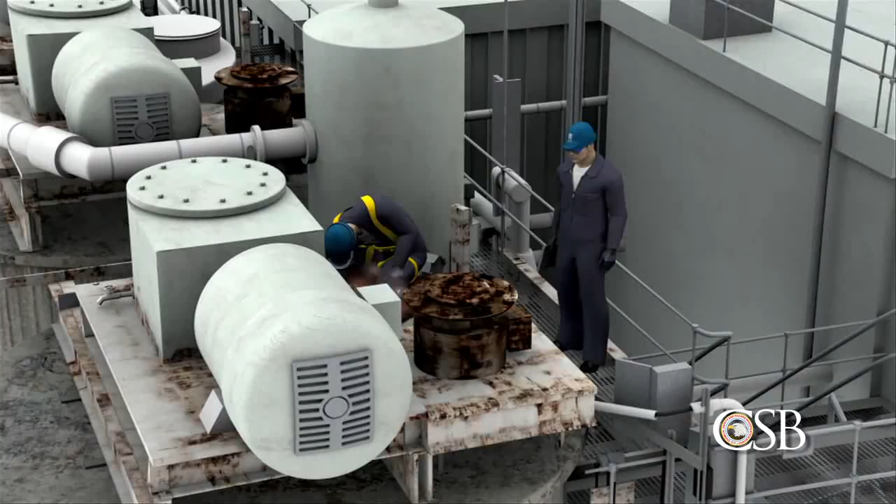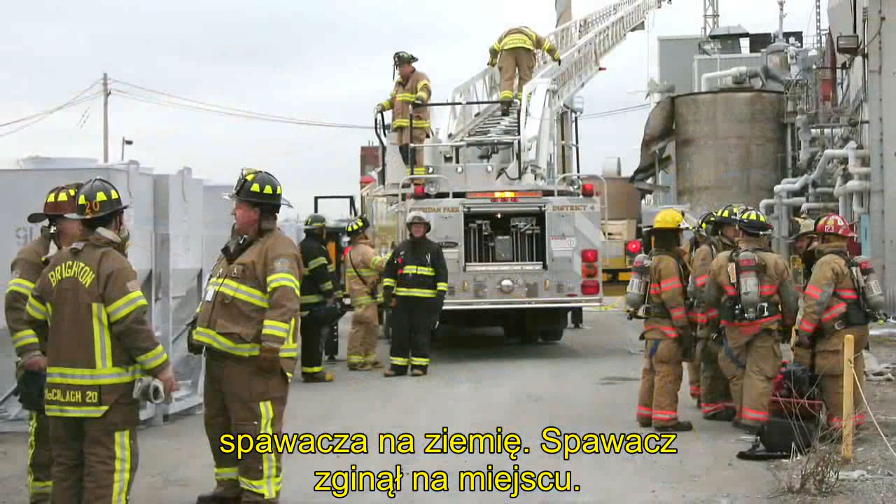On November 9, 2010, a powerful explosion shook the DuPont chemical manufacturing plant in Tonawanda, New York, a suburb of Buffalo. A contract welder was performing maintenance work on a tank that, unknown to him, contained flammable gas. The explosion blew the top off the tank, throwing the welder to the ground and killing him instantly. A second contract worker was burned.

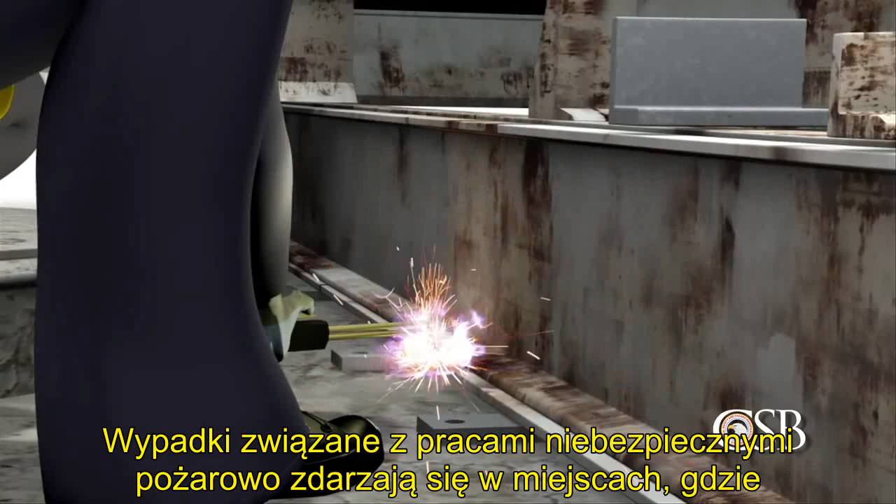The tragic explosion at the DuPont facility exposed weaknesses in how process hazards were analyzed and controlled. The result was the death of a welder in a preventable hot work accident. Hot work accidents occur when workers are welding, cutting, or grinding near flammable vapor, and were the focus of a 2010 CSB safety bulletin. Deficiencies in the safety management of hot work were among the causes of the tragedy at DuPont.

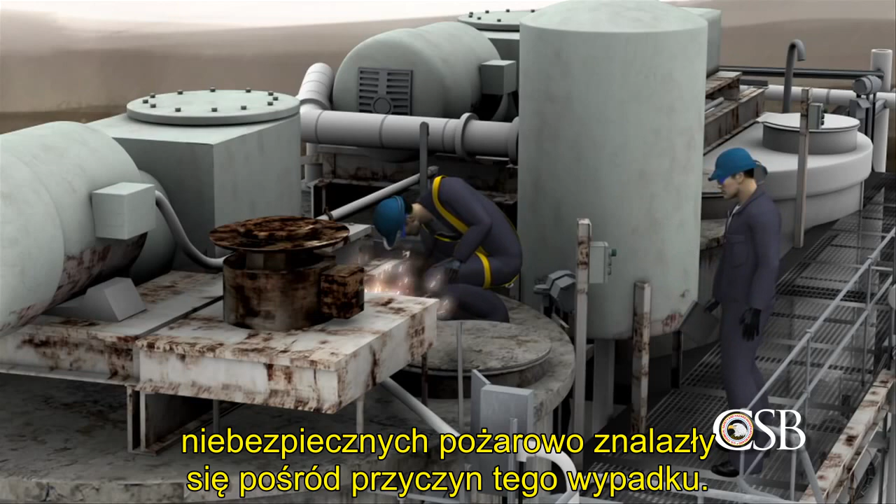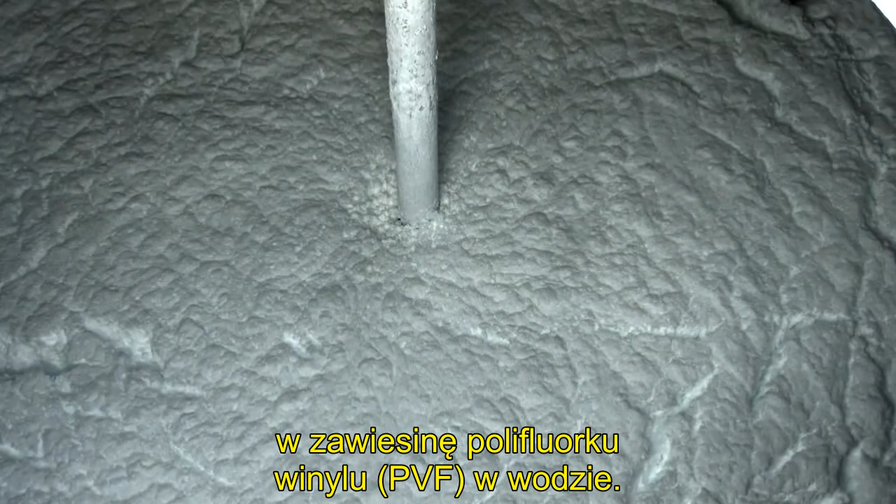DuPont's Tonawanda facility manufactures a polymer known as Tedlar, used in solar panels, and Corian for use in countertops. The process of producing Tedlar began with a chemical reaction to convert flammable vinyl fluoride gas into a slurry of polyvinyl fluoride polymer, or PVF, in water. The PVF slurry then passed through separators.

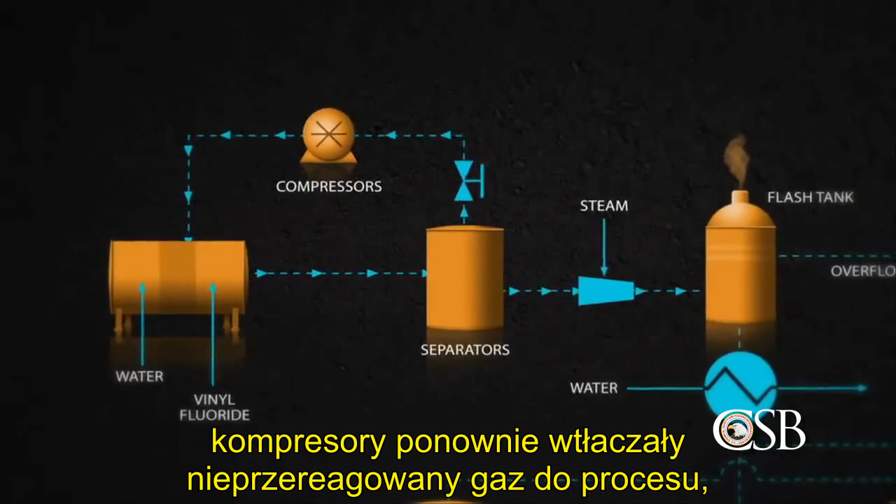Compressors recycled unreacted vinyl fluoride gas into the process, while a small flash tank released residual vinyl fluoride into the atmosphere. Finally, the slurry was transferred to one of 3 insulated holding tanks, usually tank number 3. Tanks 1 and 2 were reserved for slurry overflow. Tank 1 normally remained empty.

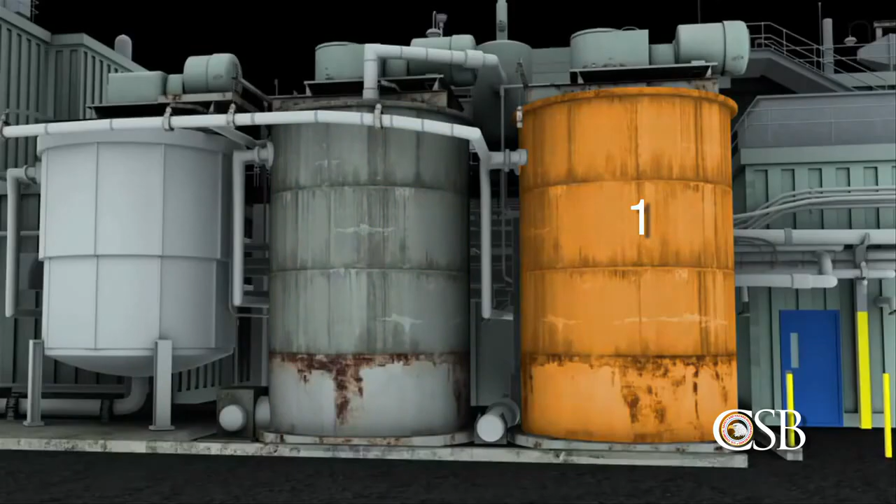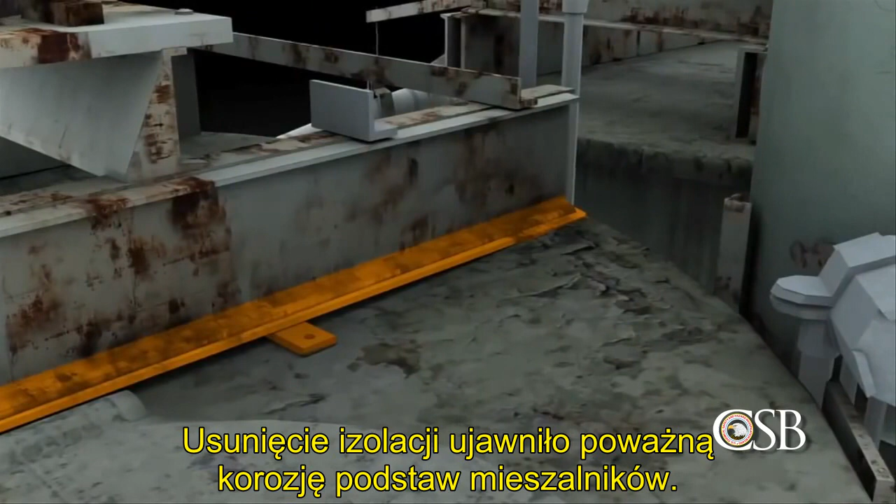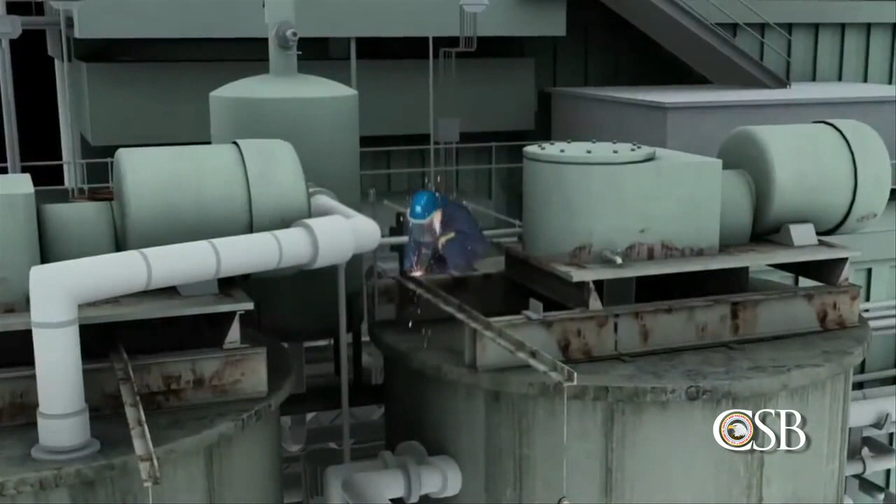On October 22, 2010, the Tedlar process underwent a planned shutdown, during which workers removed the asbestos insulation on tanks 1 and 2. Removing the insulation revealed that the agitator supports for the tanks were heavily corroded. DuPont directed contractors to repair the supports, which would involve welding and grinding on tanks 1 and 2. The hot work on tank 2 occurred during the shutdown without incident, but the repairs on tank 1 were delayed while parts were ordered. DuPont personnel determined that it would be safe to perform hot work on tank 1 after the restart.

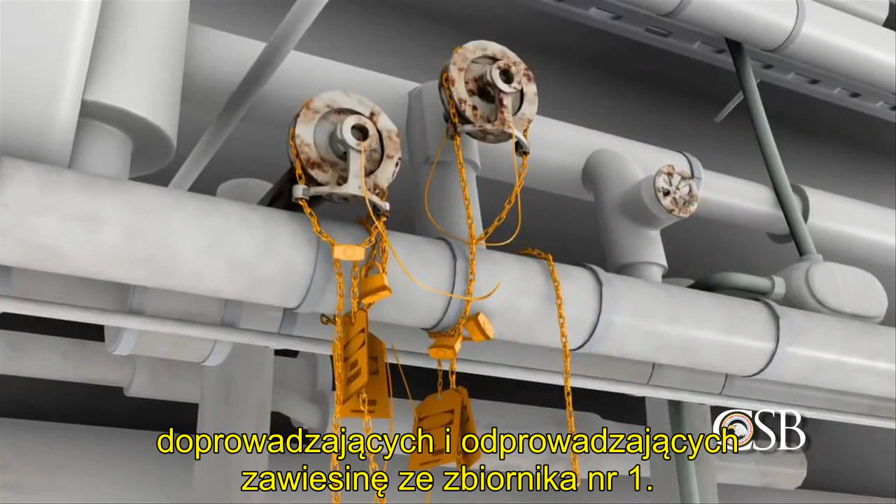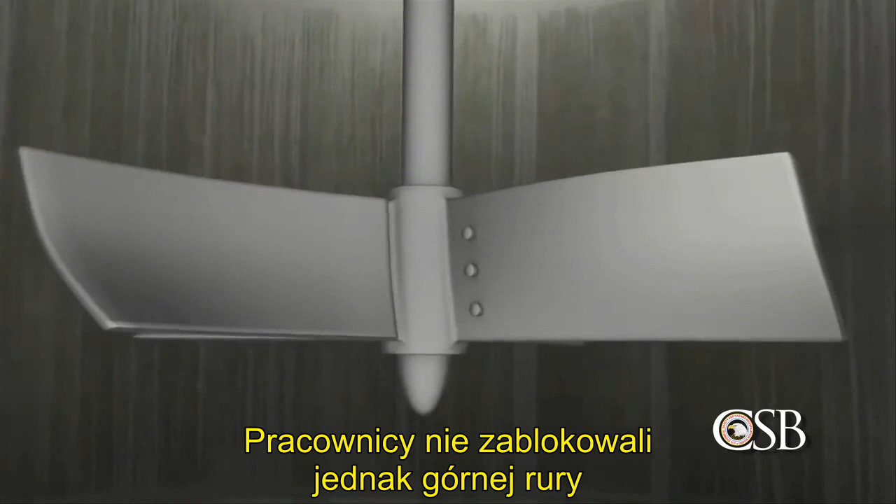On November 7th, DuPont operators locked all 5 valves leading to and from tank 1 in the closed position in order to stop potential slurry flow. The tank's agitator motor was also locked out. However, DuPont personnel did not block the flow of gas inside the overhead piping, or overflow line, that connected the vapor space of all 3 tanks. They mistakenly believed that flammable vinyl fluoride gas could not reach any of the slurry tanks.

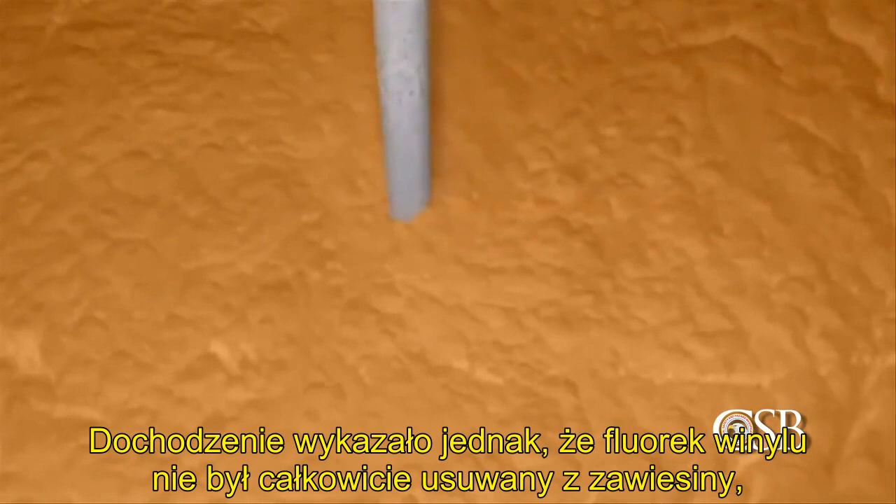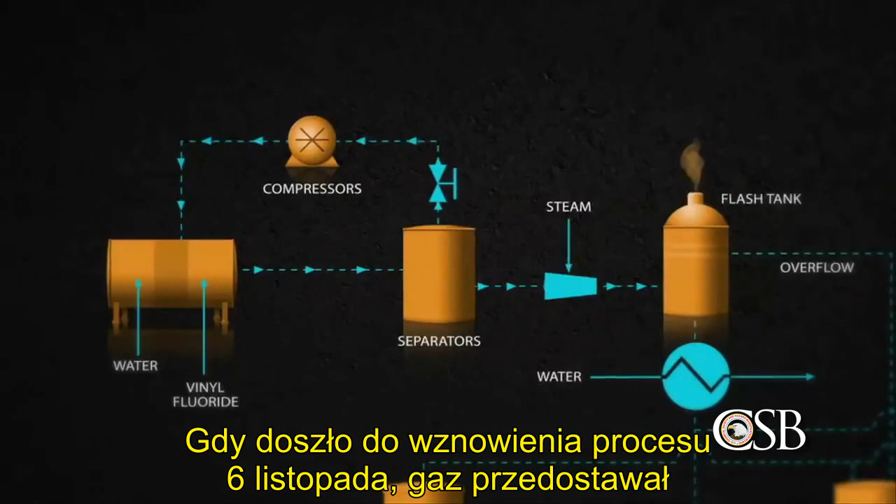But the CSB investigation found that even in normal operations, vinyl fluoride was not completely removed from the slurry and was always present in the slurry tanks in varying amounts. When the process restarted on November 6th, the flammable gas was able to travel from tanks 2 and 3 through the open overflow line into tank 1.

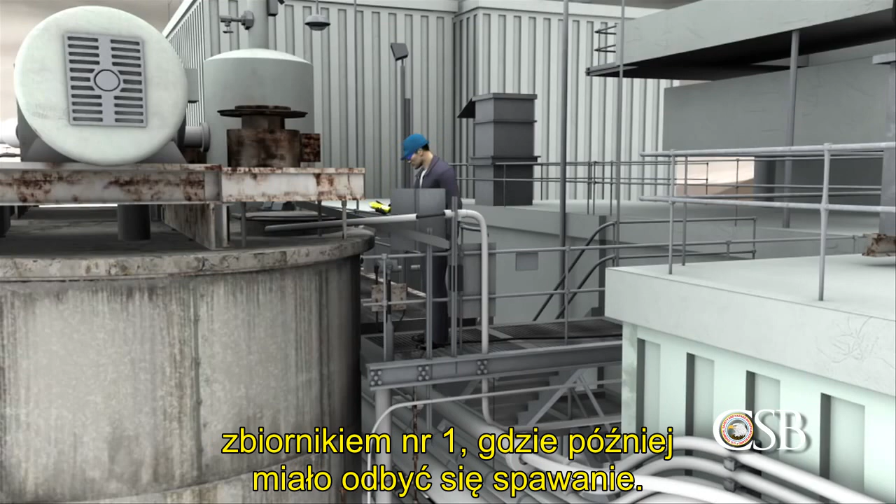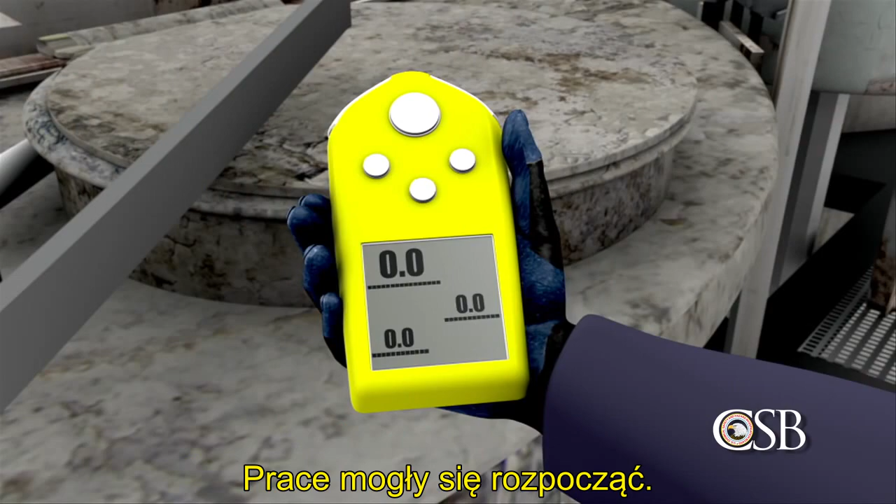On the morning of November 9th, a DuPont technician tested the atmosphere above tank 1, where welding would later take place. There were also 2 continuous air monitors in the vicinity. No flammable gas was detected, and the hot work was cleared to begin. But no testing was done to measure or monitor the atmosphere inside the tanks, where, unknown to the contractors, the flammable gas was at dangerous levels.

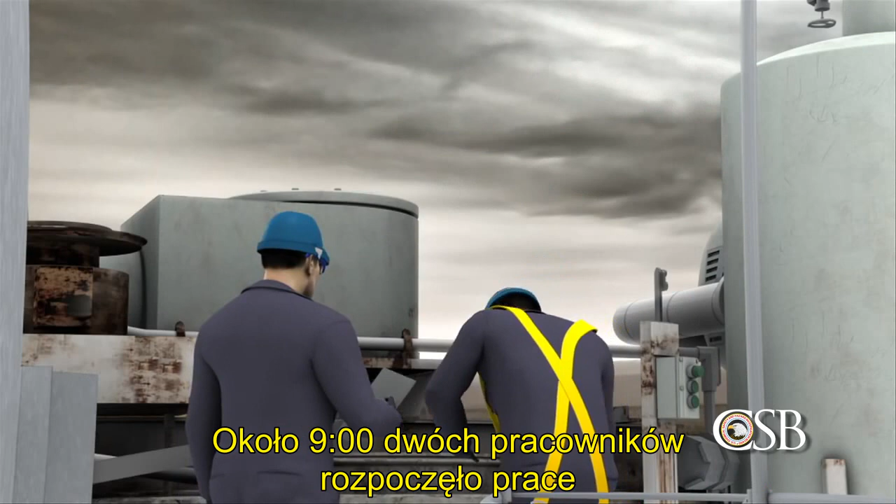Around 9 a.m., 2 contract workers began welding and grinding on tank 1. The welder connected his safety harness to the tank's agitator support and worked on top of the tank as the foreman looked on from the nearby catwalk. At approximately 11 a.m., the welder was repairing corroded portions of the agitator support beams directly above the flammable gas.

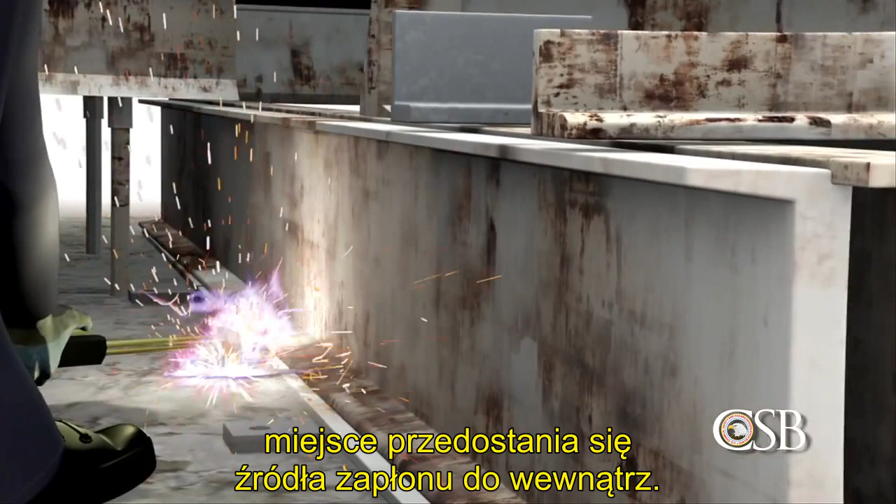A hole around the agitator shaft may have provided a pathway for ignition. Welding sparks could fall into the tank, even as flammable gas might drift upward toward the sparks. The ignition of the vinyl fluoride caused a powerful explosion.

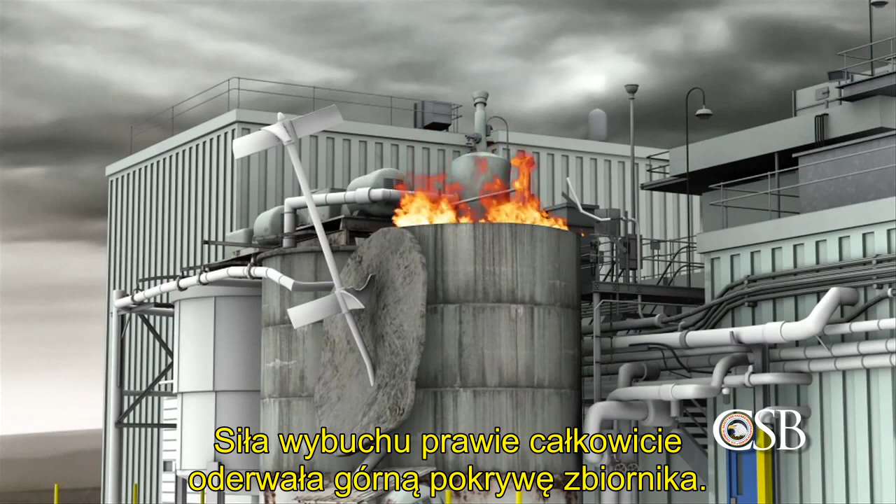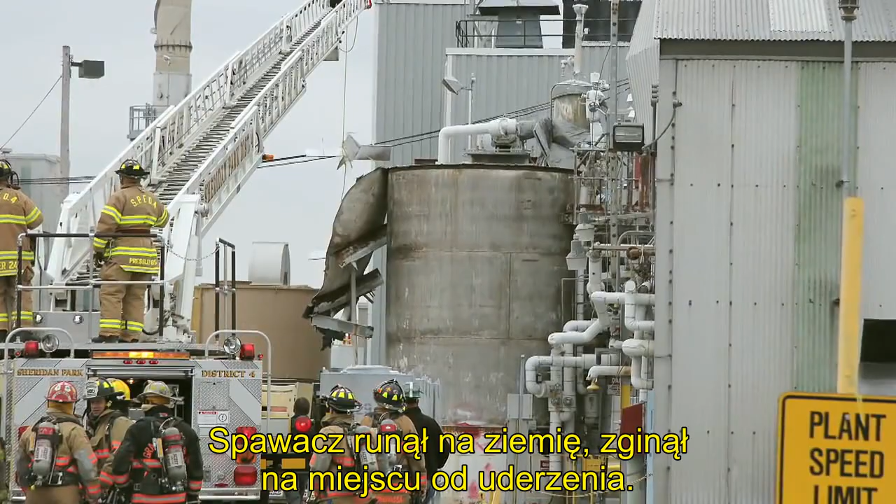The force of the blast blew the top of the tank almost completely off. A flash fire erupted that consumed the flammable gas and quickly burned out. The welder was thrown to the ground, killed instantly from blunt force trauma. The foreman's face and arms were burned.

Mark Wingard was a member of the CSB team that investigated the accident at DuPont. Had DuPont technicians tested Tank 1 for a flammable atmosphere, they would have known that any hot work presented a serious explosion hazard. But plant engineers did not realize that significant amounts of flammable gas could be present in the slurry tanks, and the testing was never done.

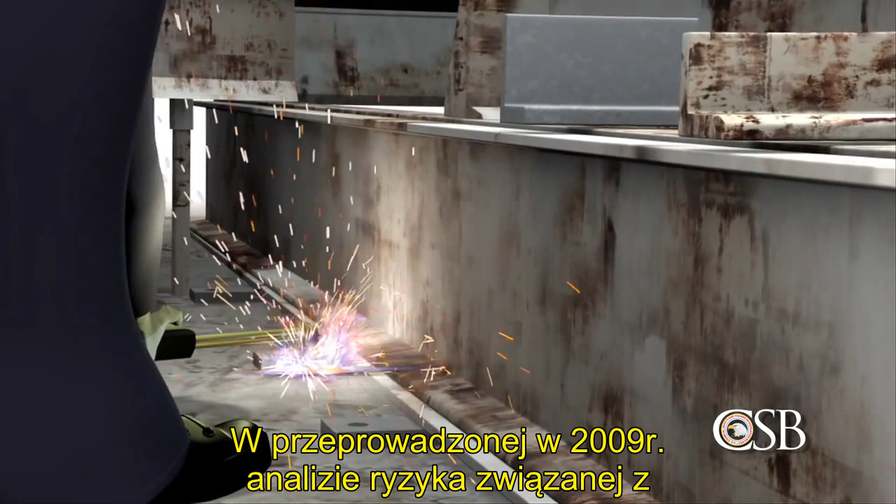DuPont regarded most of the Tedlar production process as covered under the OSHA standard for Process Safety Management, or PSM, and therefore subject to stricter operating and maintenance requirements. But DuPont personnel did not include the slurry tanks in the facility's PSM program. In a 2009 process hazard analysis, DuPont erroneously concluded that flammable vinyl fluoride gas could never reach the tanks in dangerous quantities.

We found that the contractors did obtain hot work permits for welding on Tank 1, but those permits were authorized by DuPont employees who were unfamiliar with the specific hazards of the process, and the permits did not require testing the atmosphere inside the tanks.

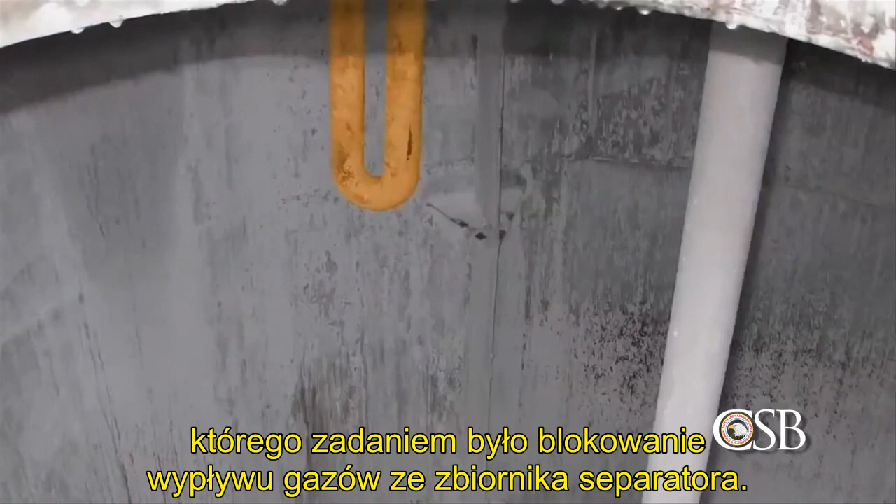Two additional factors may have contributed to the tragedy. Prior to the explosion, DuPont personnel had discovered that slurry tank number 2 had a hole in a liquid trap, which was designed to prevent the flow of gas from the flash tank. Without a liquid seal in the trap, there was an additional pathway for vinyl fluoride gas to flow into the tanks. However, this hazard went unrecognized, and DuPont engineers concluded that it would be safe to return the tank to service. No formal management of change review was conducted.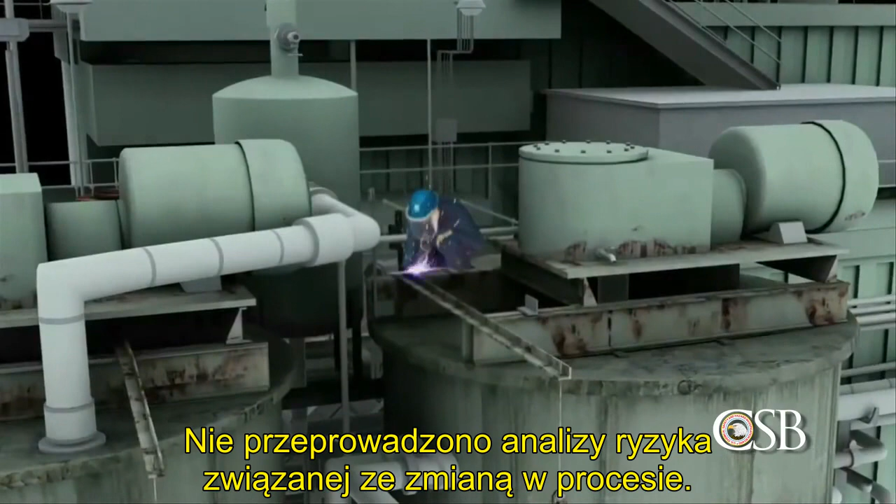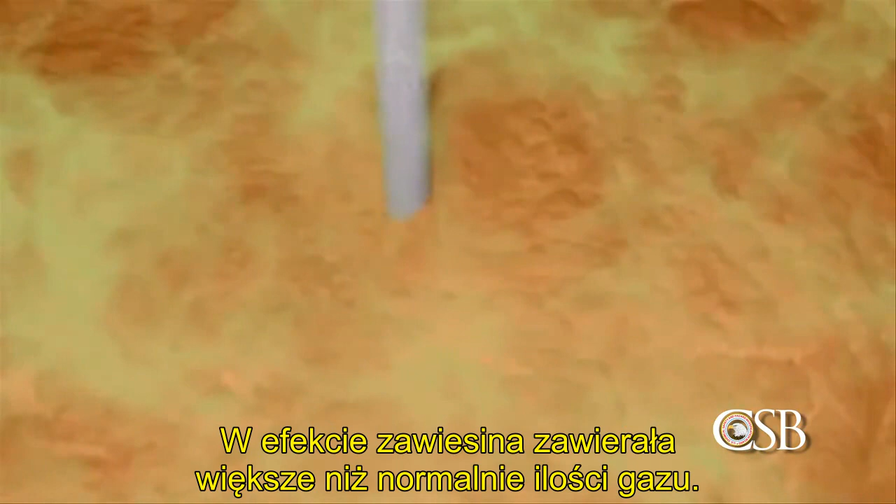Further adding to the danger, on November 8th, there was a malfunction in a compressor used to strip vinyl fluoride gas from the PVF slurry. As a result, the slurry contained more than the normal amount of vinyl fluoride. Once again, DuPont personnel did not formally analyze the safety impact of continuing to operate with a malfunctioning compressor.

In its final report, the CSB recommended that DuPont revise its corporate policies to require atmospheric monitoring inside tanks before and during any hot work. And the board recommended that DuPont require all process piping, including vent lines on tanks, to be positively isolated before authorizing any hot work.

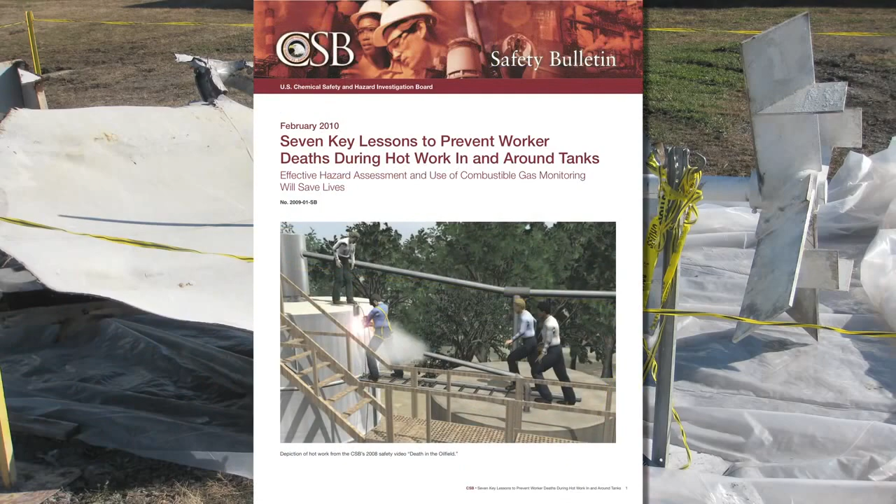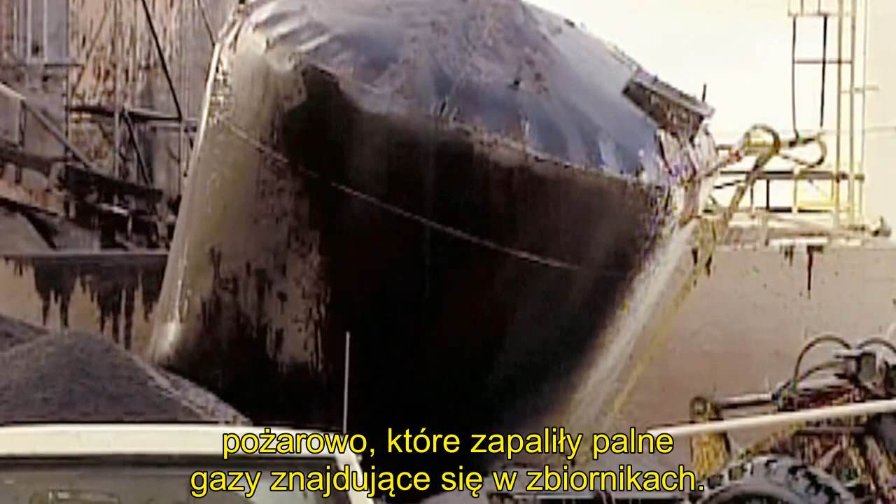In our 2010 Hot Work Bulletin, the CSB identified 11 accidents similar to the one at DuPont. All involve hot work on tanks that ignited flammable gas inside. In all cases, the CSB found that there was not an adequate system in place for monitoring the atmosphere for flammable vapor where hot work was to occur.

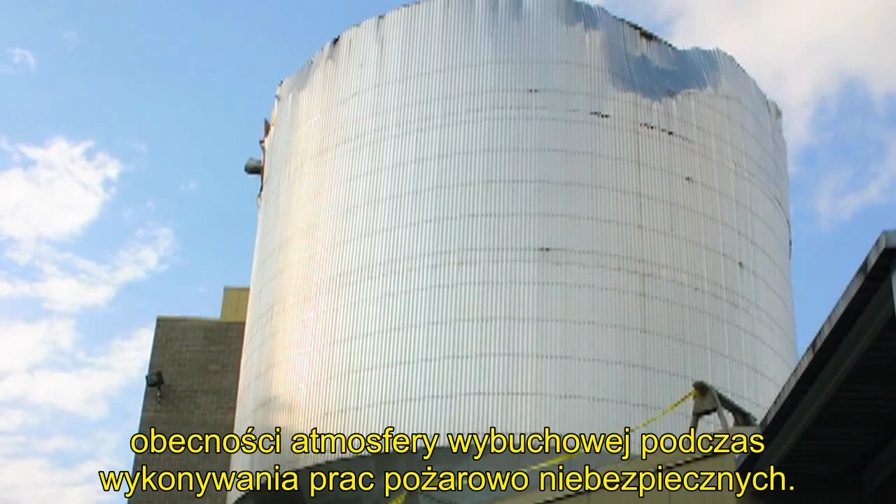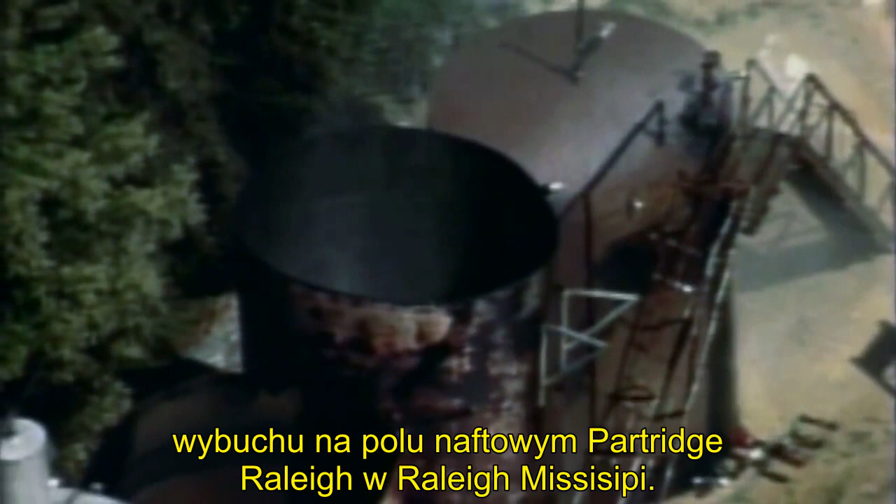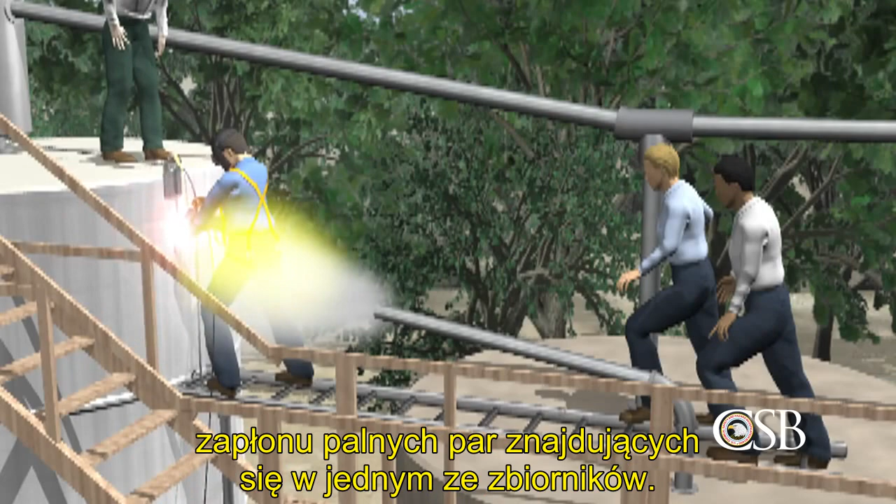For example, in June 2006, 3 contractors were killed and another seriously injured in an explosion at the Partridge-Raleigh oil field in Raleigh, Mississippi. The contractors were welding on one of 4 storage tanks when welding sparks ignited flammable vapor flowing from an adjacent tank. As was the case at DuPont, no monitoring was performed to test for flammable gas inside the tank, and piping to the adjacent tank was not isolated.

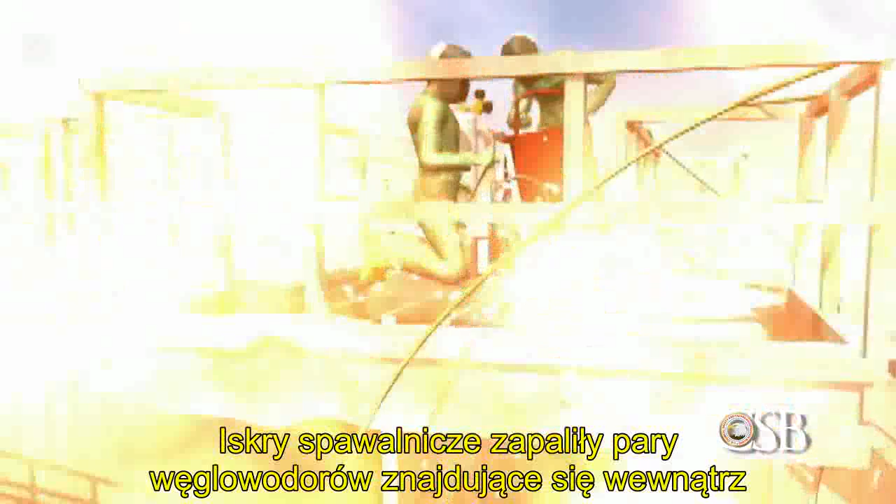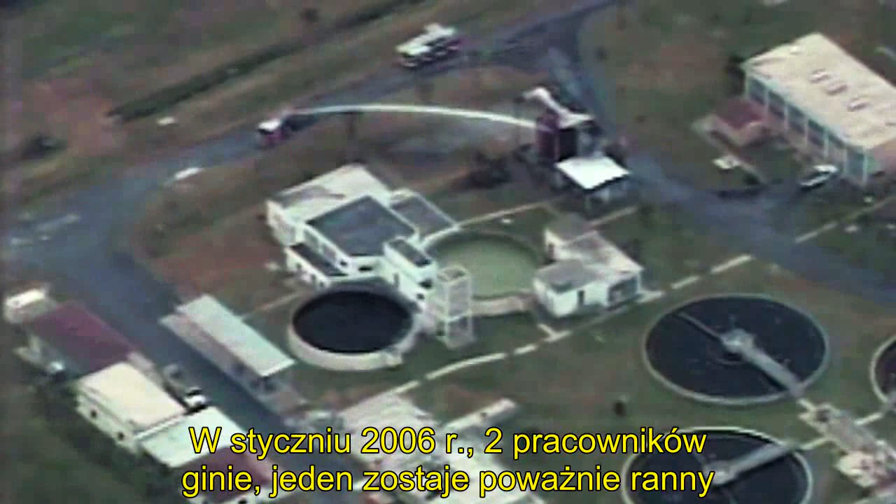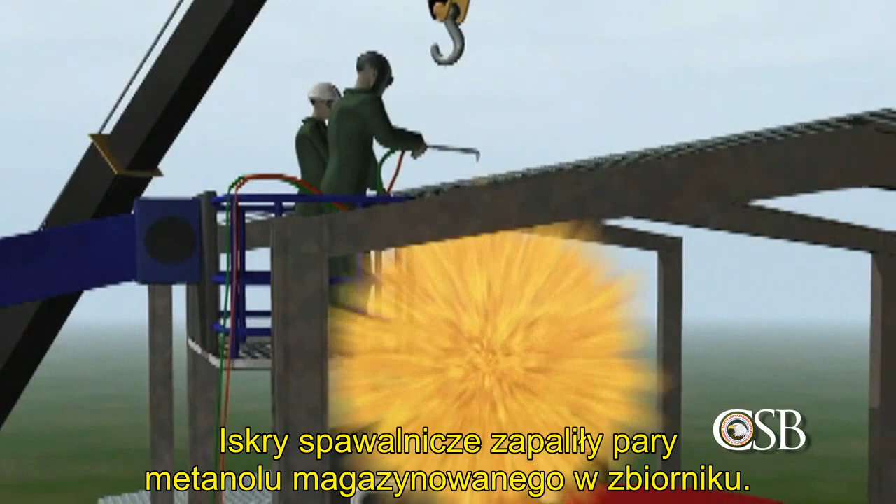In July 2001, an explosion killed 1 contract worker and injured 8 others when welding sparks ignited flammable hydrocarbon vapors in a large sulfuric acid storage tank at Motiva's Delaware City refinery. And in January 2006, 2 workers died and another was seriously injured in an explosion at a municipal wastewater plant in Florida when hot work ignited vapor inside a storage tank of highly flammable methanol. In all of these cases, combustible gas monitoring either was inadequate or wasn't performed at all.

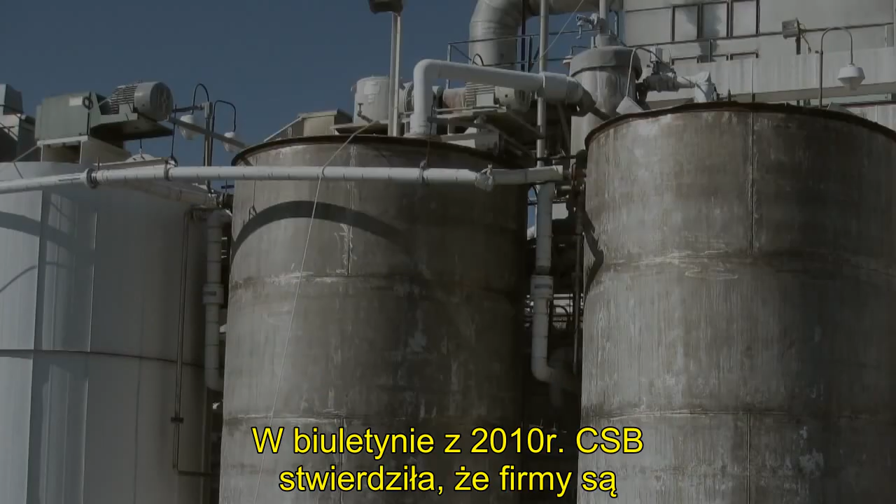In its 2010 safety bulletin, the CSB said companies can prevent hot work accidents by analyzing the hazards, enforcing rigorous training and permitting procedures, constantly monitoring the atmosphere for flammables, and avoiding hot work in favor of non-spark producing methods whenever possible. Hot work is often seen as a routine activity, but it can prove deadly if fire and explosion hazards are overlooked.